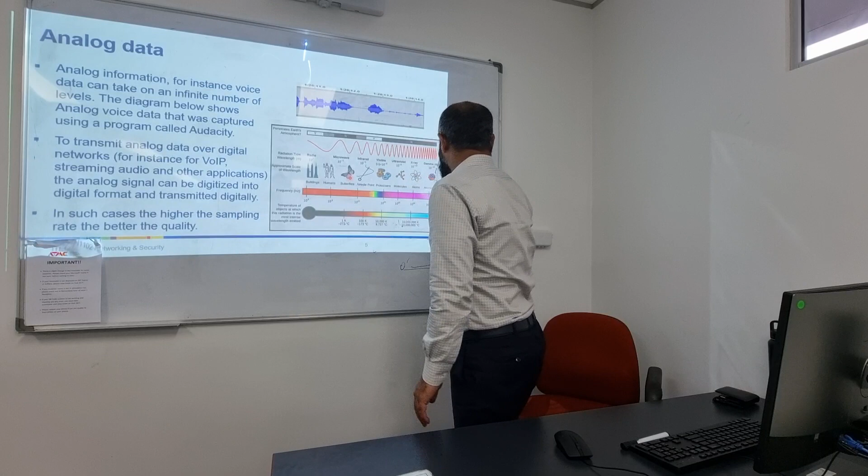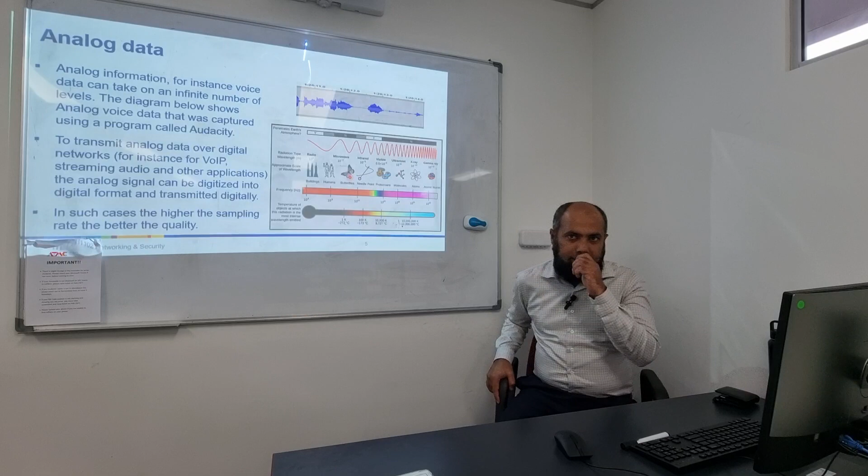So before that, first of all, look into this image. What is this image telling us? Why are they putting images there of a building, human, butterfly, needle? What do you think? Why? Does it make sense? Any idea how to read this image?

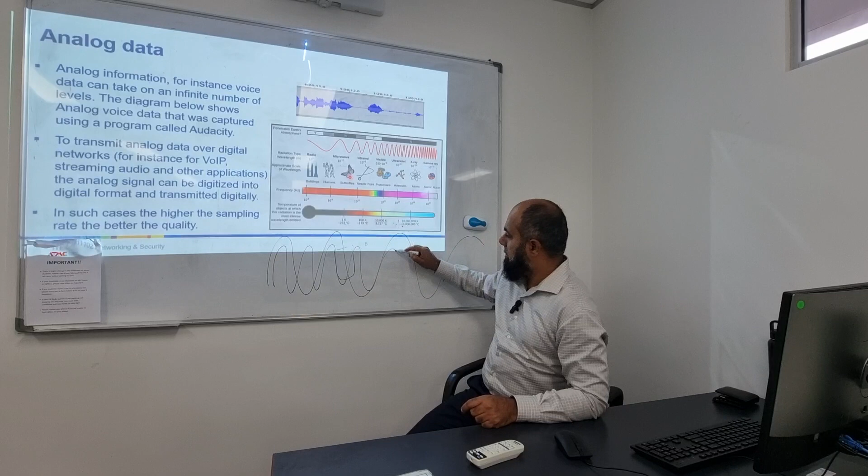Okay, I'll just give you an example. Let's say you have this remote, this length. There are waves coming like that, and then there is another type of wave which fluctuates more, more number of times, and then there is another one. I just made three. So which one has more possibility to hit that target? The first one, second one, or third one? The target is that remote which is there.

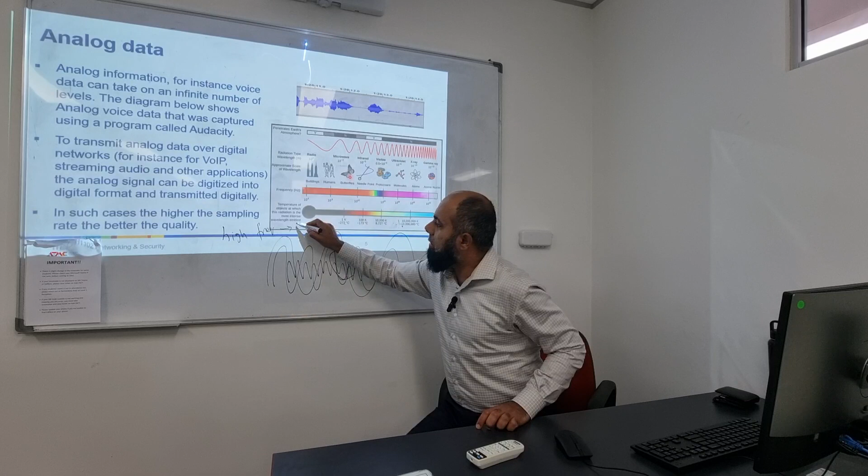Everyone will hit the target because... No, no, but which one has more intensity, probability, more chances? That is the third one. Third one. Why? So it's making so many waves, with a smaller value. It means that if the wavelength is smaller and smaller, it has more penetration power. So in our X-rays and radiation, they are very high frequency. Remember that when it is high frequency, then at the same time our wavelength is low.

Okay, high frequency wavelength is smaller and smaller. That's why X-rays can penetrate to our tissue levels to see whether there is any fracture or not. So what they do is they send the radiation, and it goes back to the system. If it goes back according to their study, that's okay. If there is some fracture, at that fracture point it will not be sent back. It means there is a gap. They pass it. So that's how they know that this person has a fracture problem.

Similarly, you go to the airports when you have any metal thing in your pocket. If they are using a low frequency metal detector, then the wavelength is so high that there is a chance that it passes here and there and that person skips with that metal device. Whereas if it's a very high frequency device, it's impossible that the metal will be undetectable, because the wavelength is so small.

Now coming to the point, it says that when your wavelength is 10 power 3, the frequency is only 10 kilohertz. Okay, at 10 kilohertz we have 10 power 3. So it means that at that stage the scale of a wavelength is a tall building, as high as 1 kilometer. So that can hit that target. So it means that for bigger objects we can use low frequency signals.

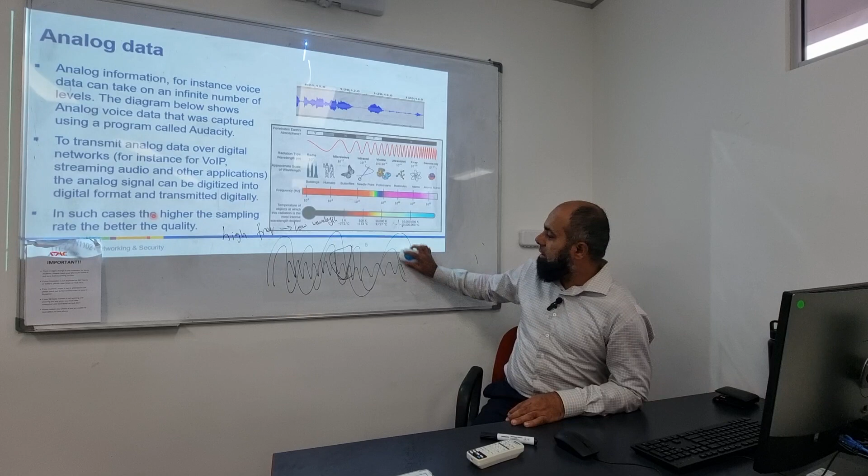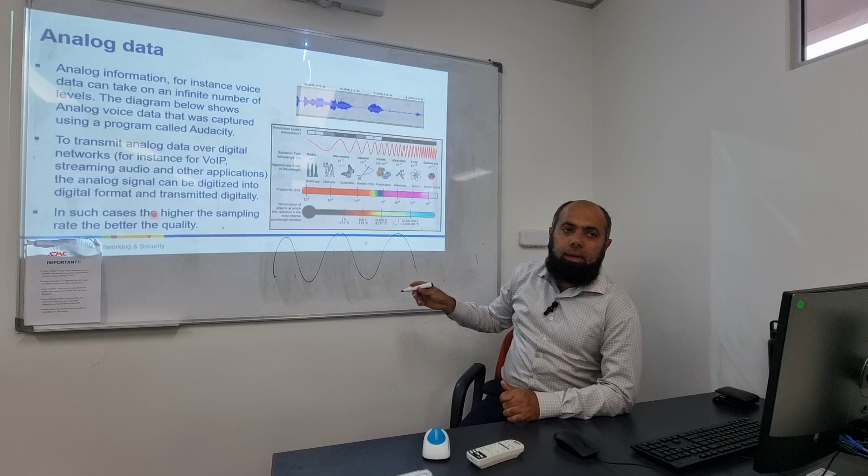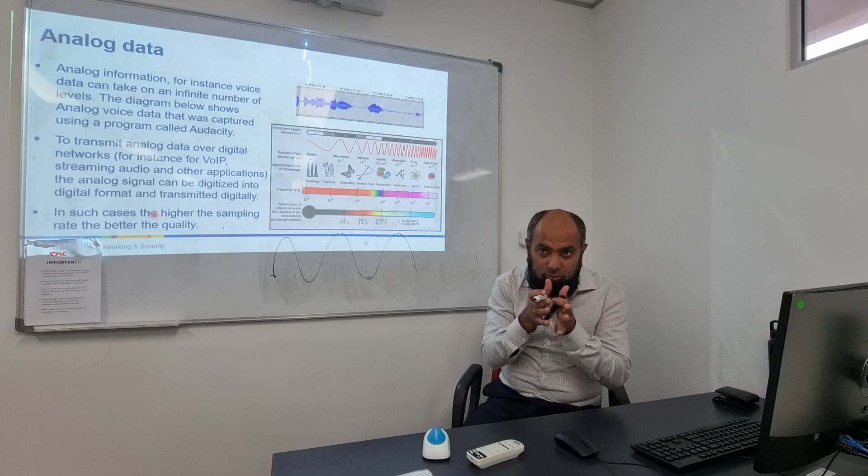Okay. The last thing is about the sampling rate. As I mentioned, for any analog signal, let's say this is an analog signal we have, and I want to reconstruct it because I want to make it digital. Because for every single point from here to here, there are an infinite number of values in between. If I zoom in on that, it's 0 to 1, like this.

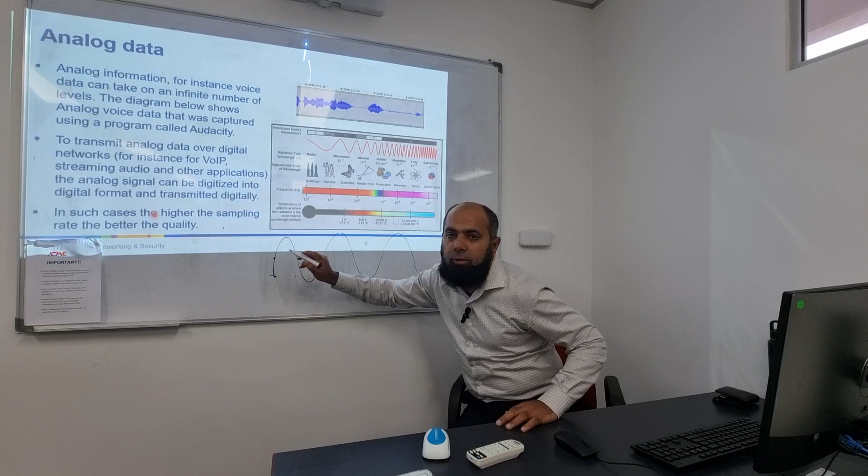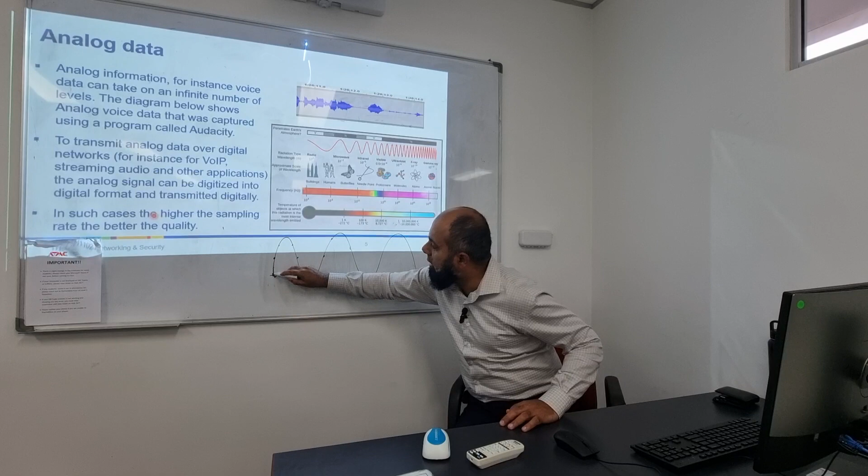So if I want to make a digital signal, I say, okay, I will take one sample here every 2 seconds, something like this. So when I reconstruct it, I have only those dots, so I can do it like this. But if I have fewer samples, one here, one here, one here, then maybe it goes like this.

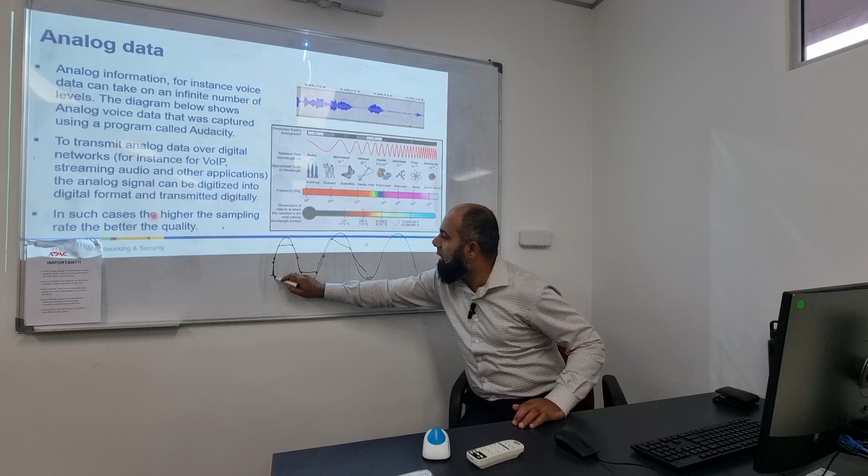So it means that the more sample values we take, the better we can reconstruct the original signal. But if our sampling rate is less than some particular amount, I'm not going into that detail, then we are not able to reconstruct our signal back. Got it?

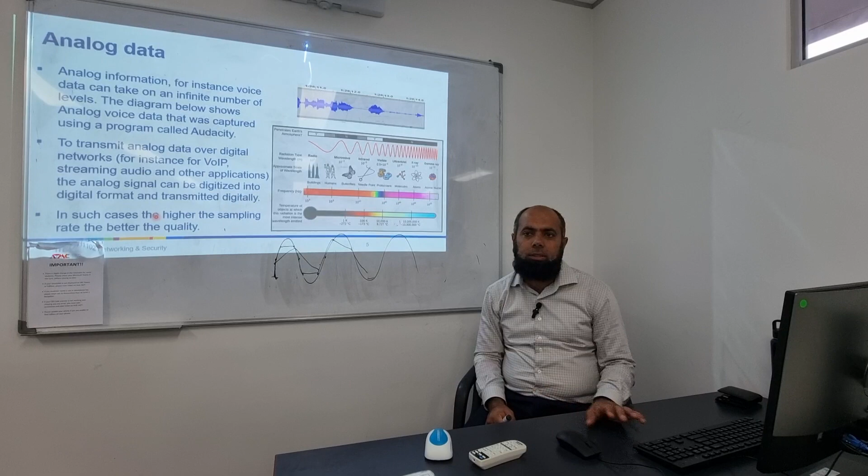So data transmission media is either digital or analog. The cable we use to connect computers was developed for the transmission of digital data. Devices like Wi-Fi access points, the telephone system, and microwave dishes are analog by nature, because when they are sending signals in the air, that's analog. In the air we don't have digital data. Once it strikes the antenna, it is converted, with some processing, into digital form.

So what we use is modulated analog transmission. Digital data can be sent over analog transmission media. The presence of an analog signal could signify a 1 bit, and if there is no signal, we say it's a 0 bit. So we are sending digital data over analog transmission lines in our systems. Now looking at point-to-point and multipoint circuits, okay, can you read that slide? Read it.

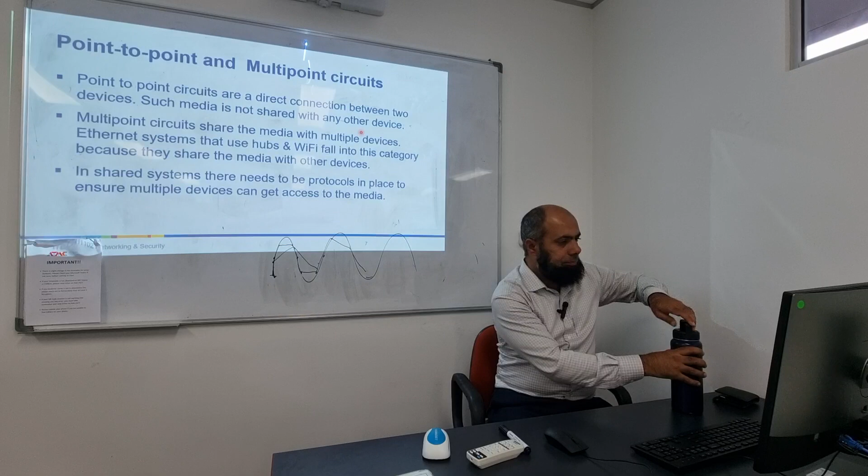Point-to-point circuits are a direct connection between two devices. Such media is not shared with any other device. Multi-point circuits share the media with multiple devices. Ethernet systems that use hubs and Wi-Fi fall into this category because they share the media with other devices. In shared systems, there need to be protocols in place to ensure multiple devices can get access to the media.

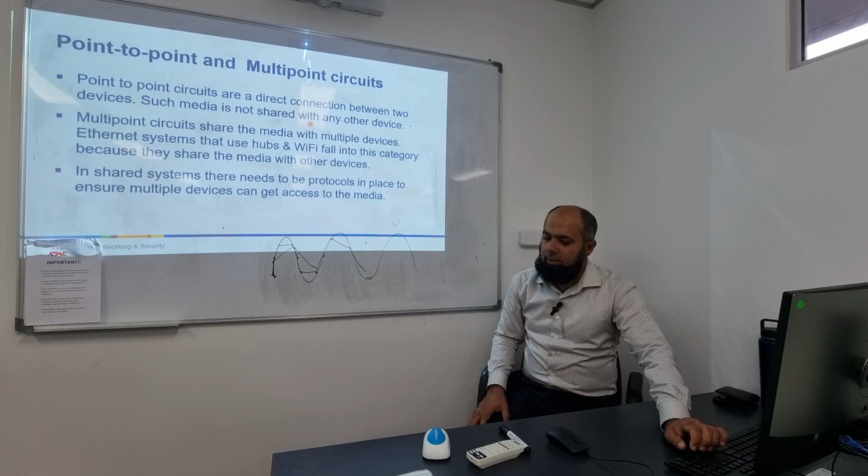Yeah. So what we are saying here is, point-to-point is one where two devices are directly connected to each other. Multi-point is the one which is connecting with multiple devices. So our Ethernet systems, for example our hubs, Wi-Fi, fall into that category where they are actually multiple points connecting, and they share the media with other devices.

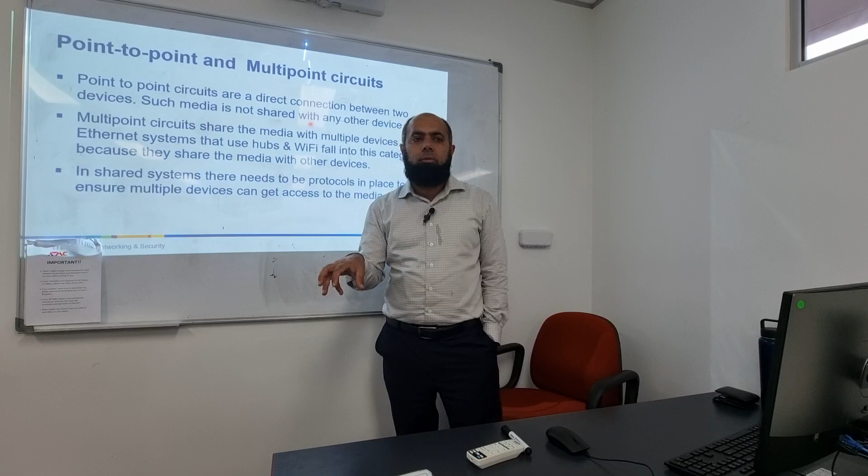And in shared systems, there need to be protocols in place to ensure multiple devices can get access to the media. So in a shared system we have switches, we have routers connected to the systems, depending on what information we need, but this is how they are connected with the media.

Coming to data flow, there are simplex, half duplex, and full duplex systems. Systems can be categorized according to the way data flows between devices. So simplex can only send in one direction. For example, a radio station sending the data, we are only going to listen to it. That's only in one direction. That's a simplex form of sending data.

Second is the half duplex system, which allows data in both directions, but at a time only one can send information. For example, a walkie-talkie. On a walkie-talkie, one person will finish his talk and stop, and then the other person will speak, and that's how they communicate over half duplex.

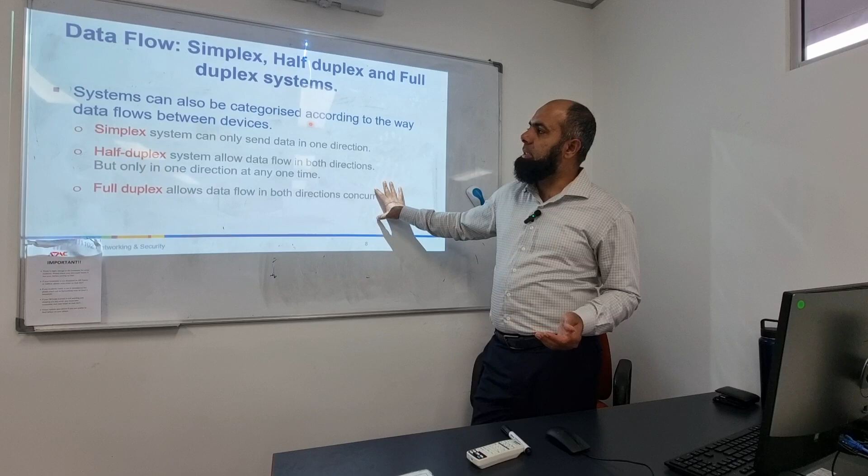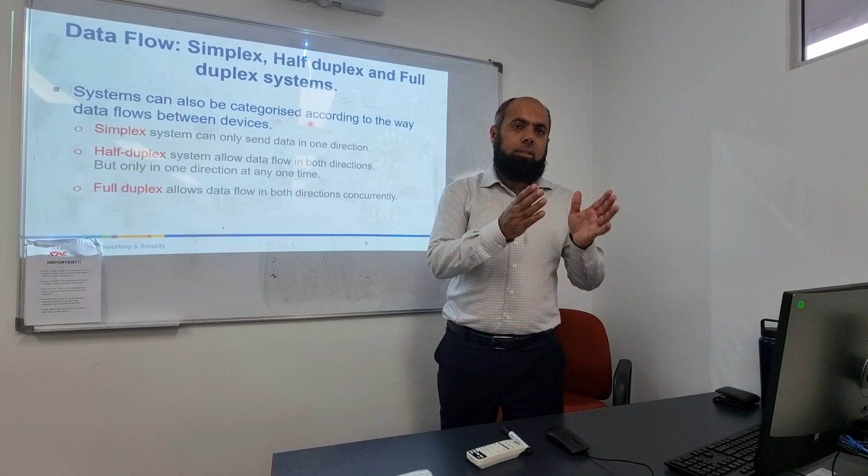Whereas full duplex is like our mobile phones, and they can transmit in both directions. Why is it possible? Because whenever we say that, it means we are making a channel, we are making a path. So the sending path to the other person is different, the receiving path is different. That's why we both are able to speak at the same time and listen and actually fight with each other.

Whereas in half duplex, it's hard to fight with each other because when one is speaking, the other has to stop. In full duplex, both can speak and maybe cut the other person off as well. But in half duplex, when one is talking, unless he says stop or something, no one can hear each other if they don't make a rule.

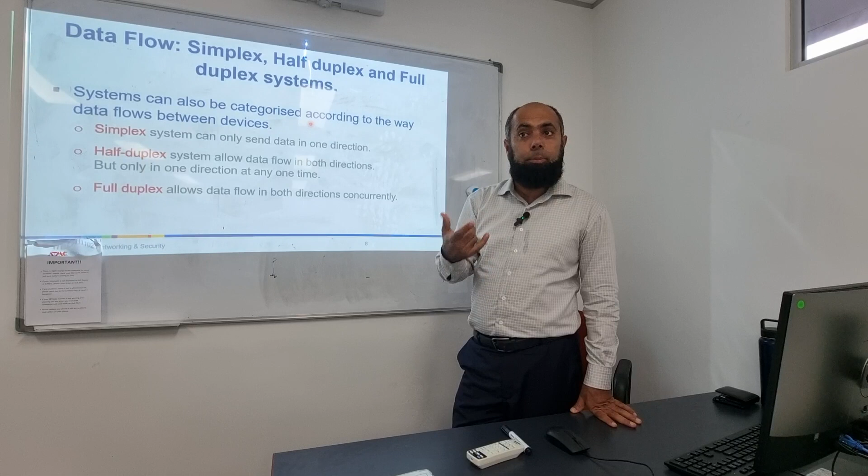So in full duplex, there are two channels. One is uplink, another is downlink, incoming and outgoing. So on our phone, when we make a call, our downlink channel is different and the uplink channel is different. Then we have the concept of multiplexing. Okay, can you read this slide?

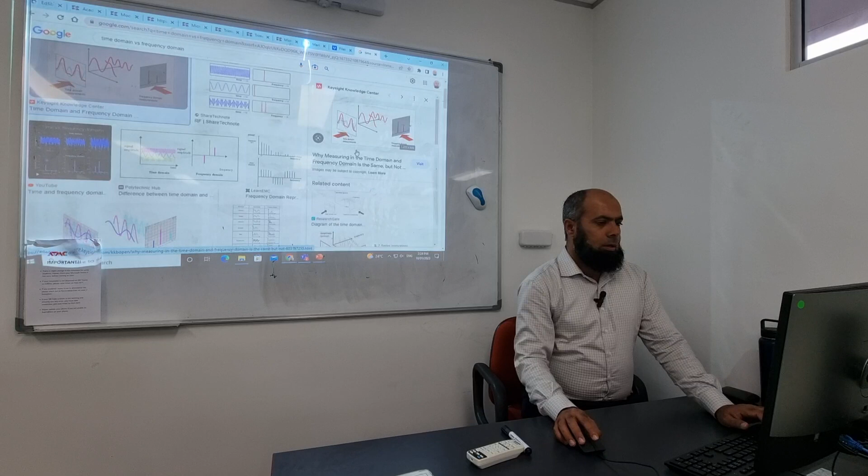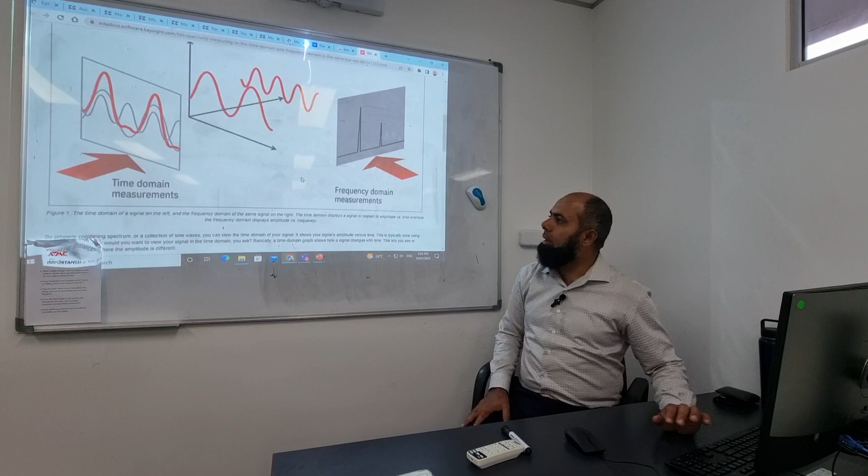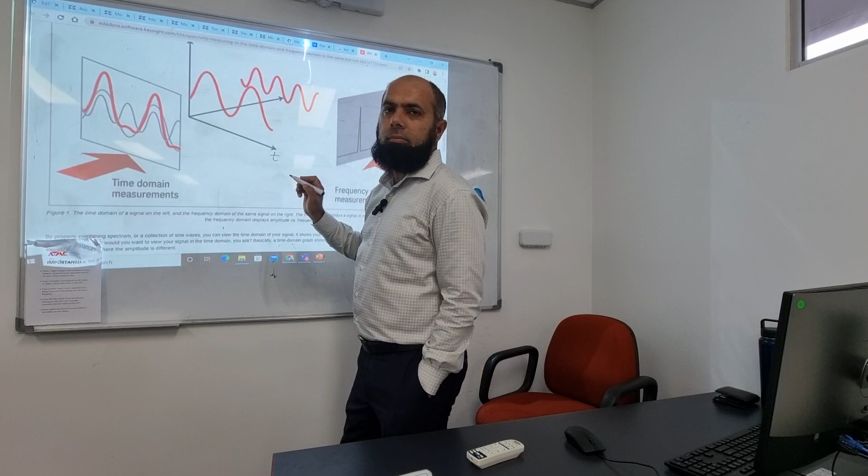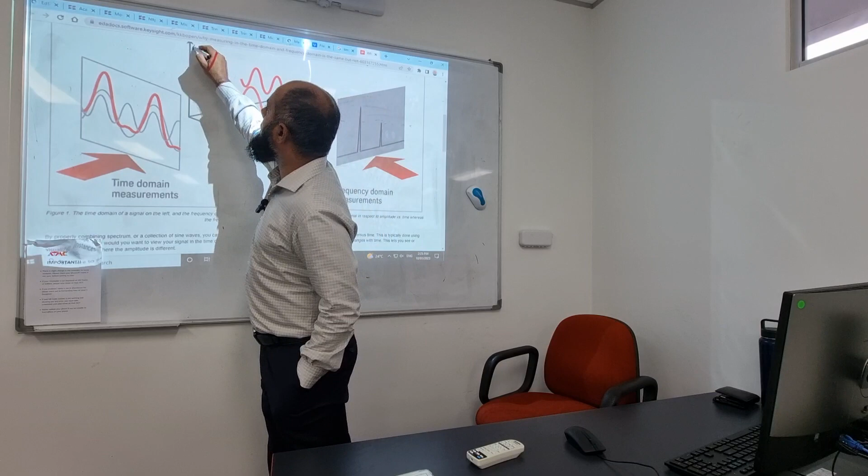There are multiple ways we can explain that. Before going into detail, I want to explain the difference between time domain and frequency domain. If you get that idea, it's very easy to understand. Okay, look at this example. Remember that this is your time wave going on. The first line is there, the second line is there, this is a frequency. This is the amplitude of the wave. How much is the amplitude?

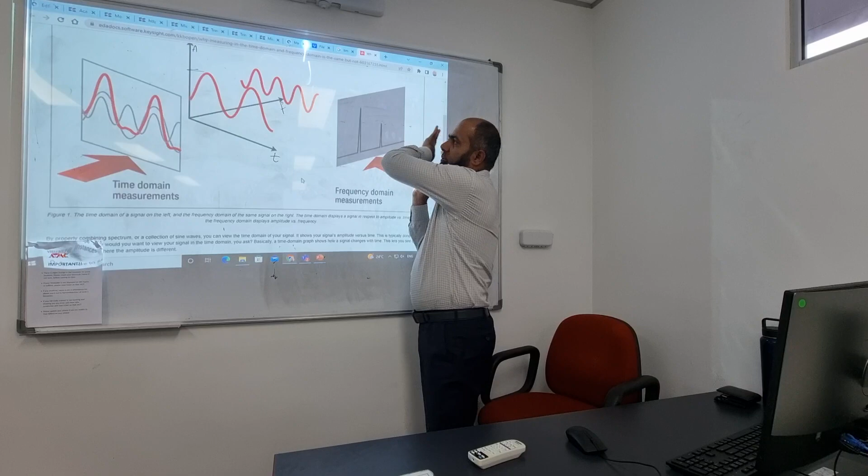Now, before that, let's say I show you this pen. What if you don't know this is a pen, or a board marker? How does it look from here? What can you see? Just a line, from your dimension. But the person standing there can only see a circle. So this is something like that. One view is from this way, and another view is from this way.

So let's first take the time domain. I'm looking from here. This is a wave I have made. Let's say this wave starts here at 0 and finishes here. So this is a frequency of 1 and amplitude, let's say 2.

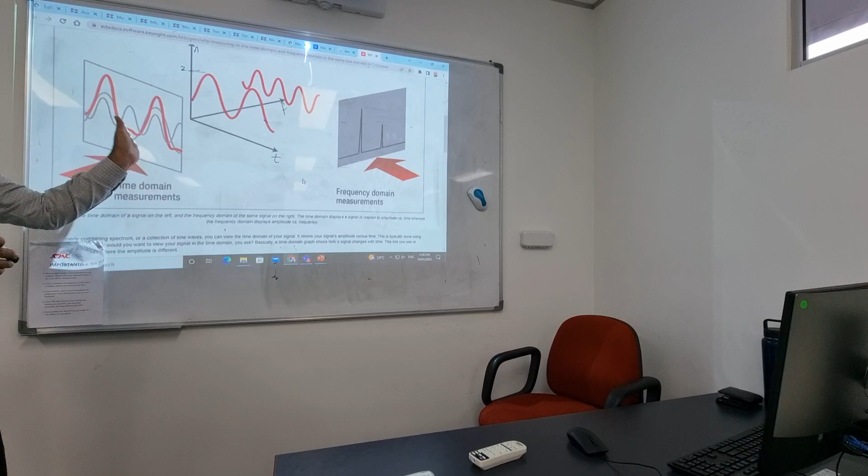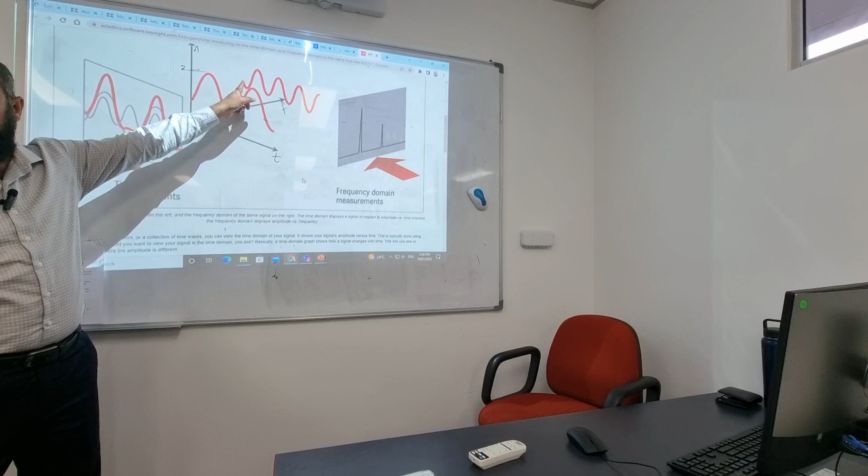Okay, this is the first one, and the second one I made because remember that this is a time signal, so I am actually making multiple waves at the same time. So another wave, if I want to make it, should be started at the same time at 0, but I make it a little bit at a different value.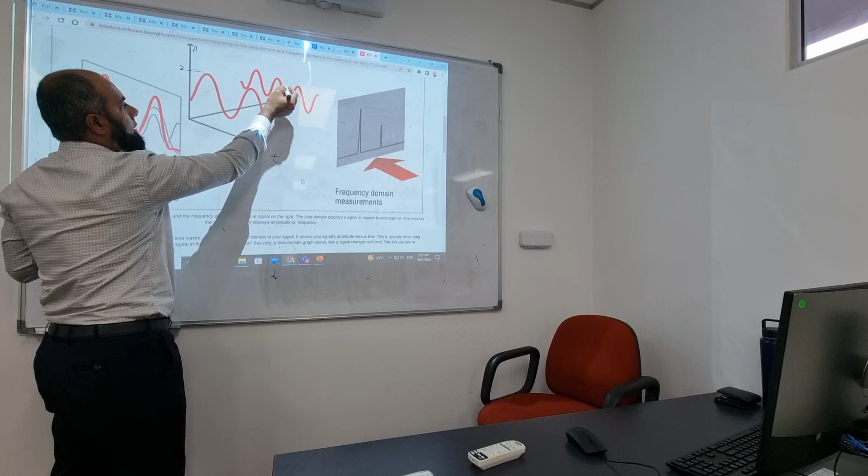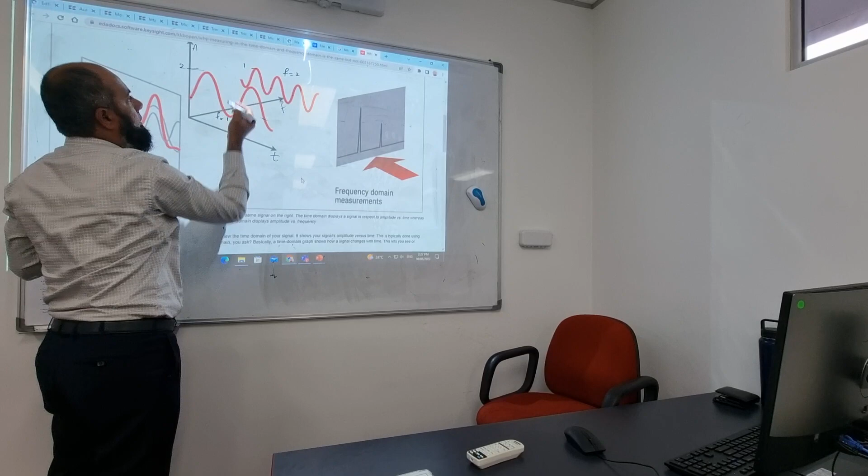What could that value be? For example, now start from here: 1, 2. Let's say the frequency of this one is 2. The frequency of this one is 1, and the amplitude of this one is, let's say, 1. Okay, so it means that this is at a position of 2. Amplitude is 2. Yes, frequency is 1 here. Here frequency is 2.

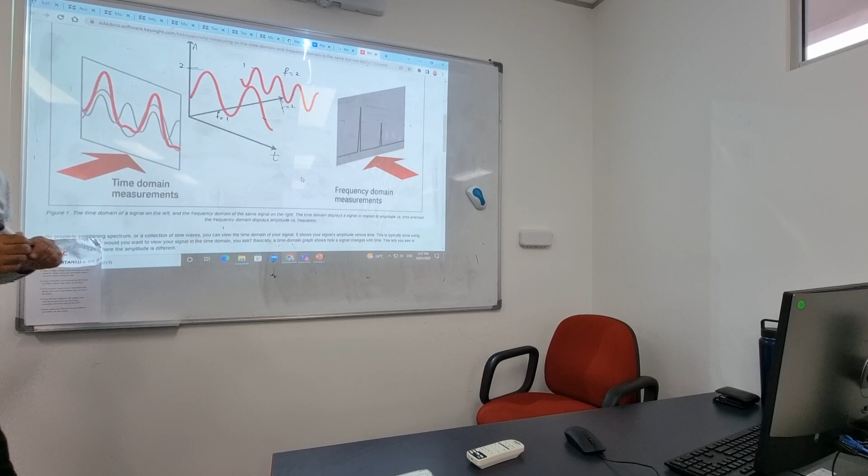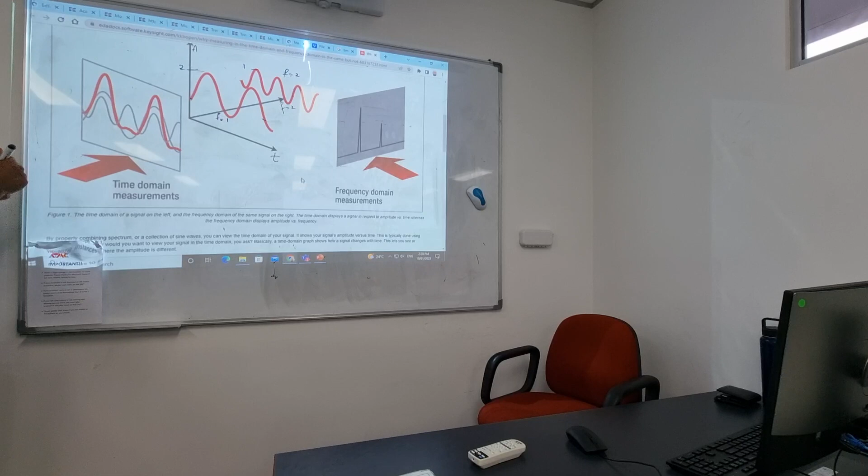So as you move forward in the frequency domain, because your frequency is going higher and higher, you're going far away from there. But it always starts from where? 0. Because all signals are starting at the same point. Now, when you see those signals here, this bigger one is the one with amplitude 2, and the smaller one is amplitude 1. Whereas this red one has frequency 1 and this is frequency 2.

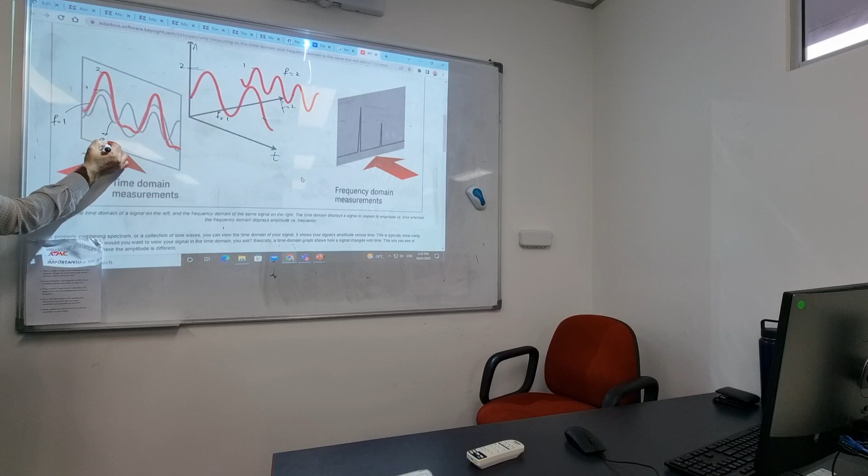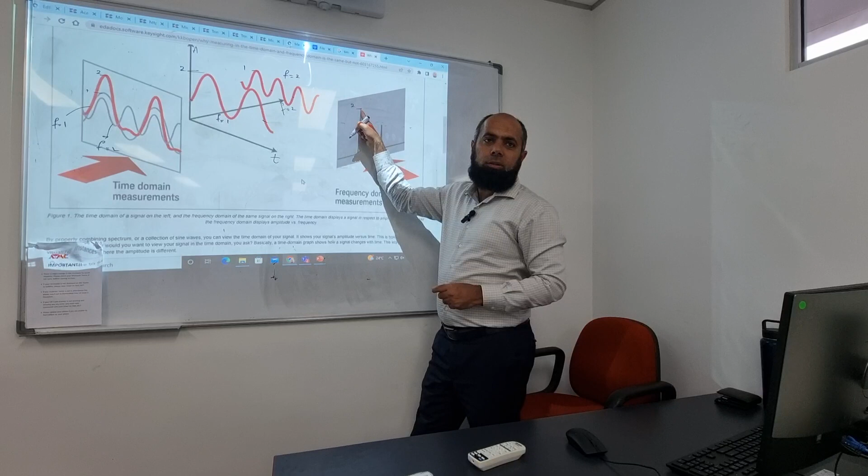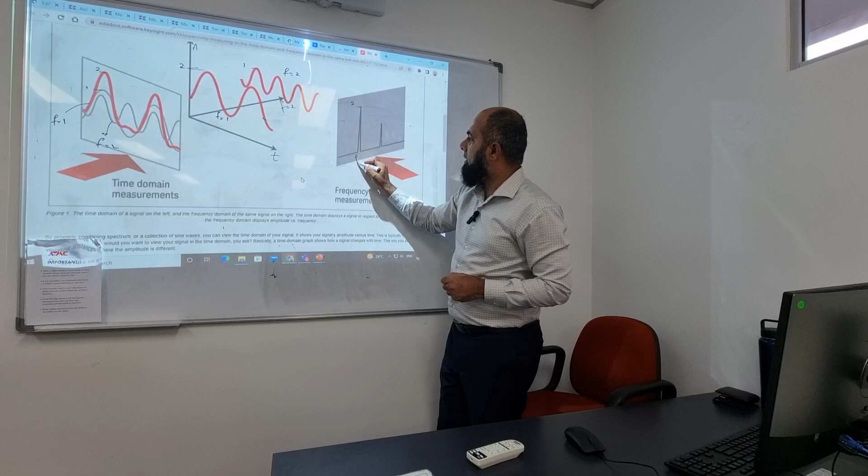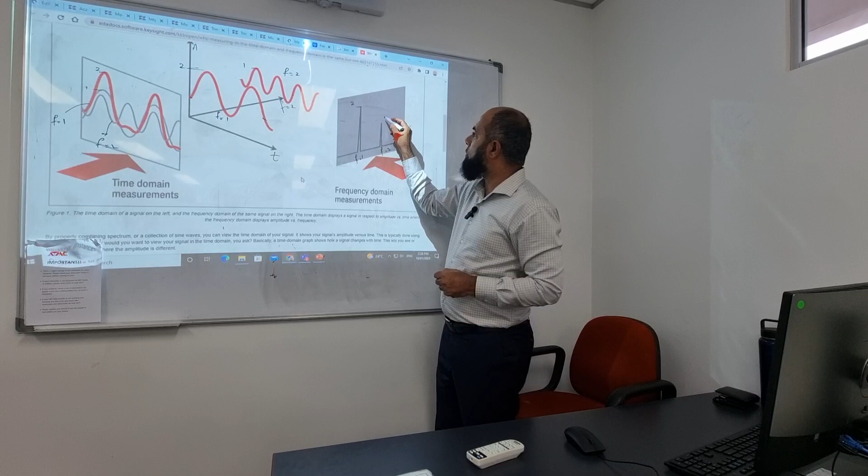Okay? Now come to this point. See from here, the frequency domain. You can see only the pulses. This pulse is what value? 2. This is amplitude. Why is it a pulse? Because this whole information from here is only a line, because we can see a line only. And therefore, we can say this is at f equal to 1. At f equal to 1 it is 2. At f equal to 2 it is 1. We can see that this one is this one.

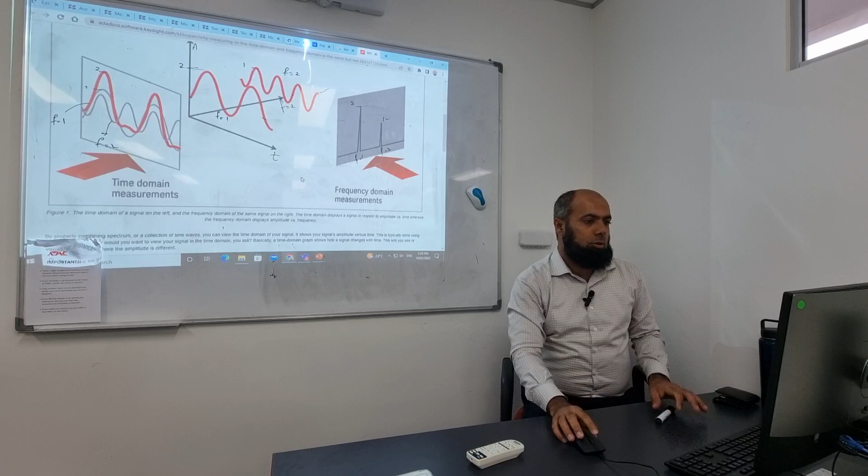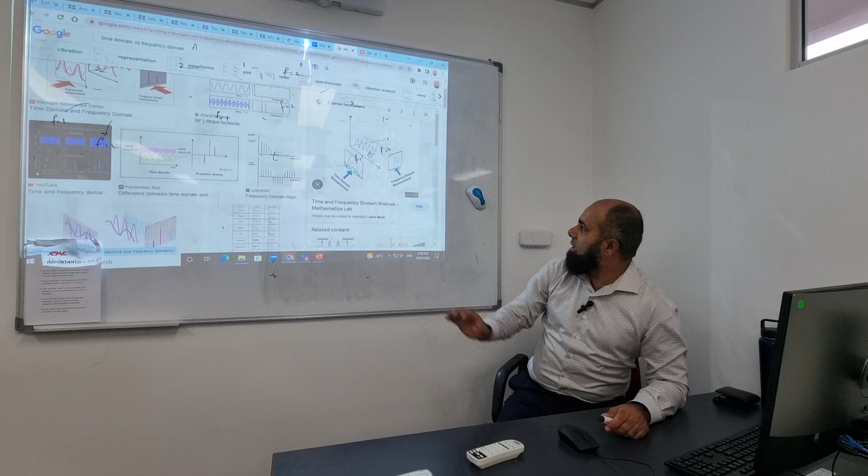Make sense? Yeah. So now if you understand that, because this is how the two-dimensional things work, we can quickly look at some examples. This is a similar thing, but you can see how it looks in different domains. So it is easy now to understand. This is a time domain signal, and if I want to see its frequency, I can see from the values this should be a higher frequency than this one. That's why it is further away from the 0 value. This is nearer to 0.

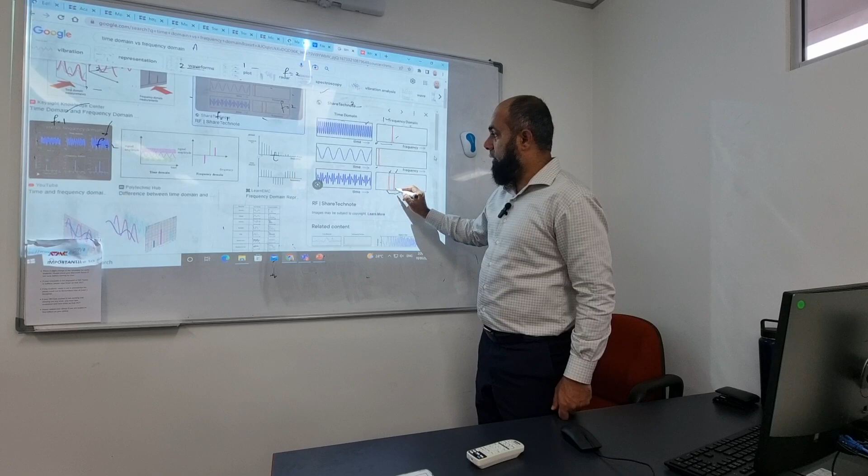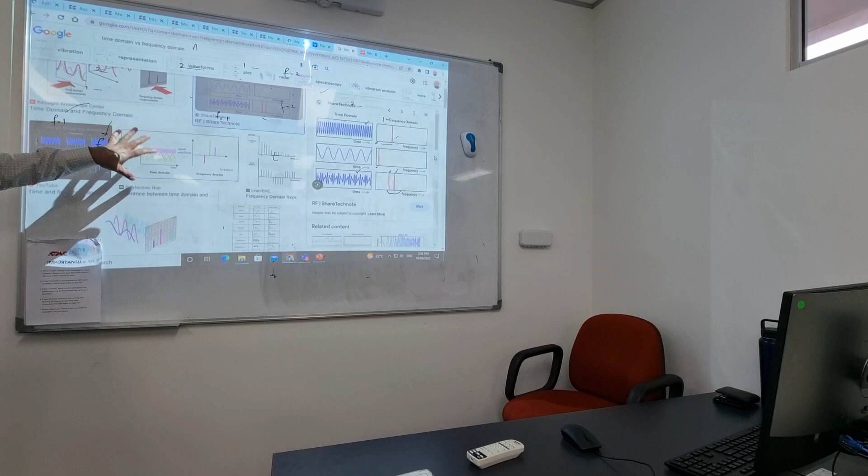And here, these two values mean that there are two frequency components in this time domain signal. This itself is a complete study, how to process frequency domain signals and time domain signals, and it's a very interesting thing. And similarly you can see anywhere. So the frequency domain and time domain are totally opposite to each other.

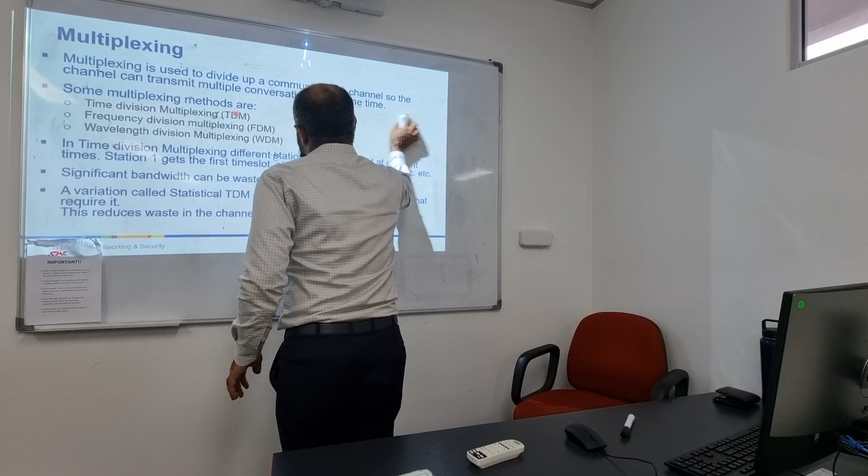Okay, now coming back to multiplexing. So here, with time division multiple access, let's say there are 8 students in the class and every student wants to talk with me, and I said okay, one student can talk 5 minutes. Then the 8th student has to wait for 35 minutes, because 7 times 5 is 35. So 35 minutes of talking, and that student has to wait that much time.

Rather, we should make it 1 minute each, then the next person waits in a queue, comes back again, and in that way every student gets time very quickly rather than waiting 35 minutes initially. The same thing happens when we make phone calls. Our calls also use time division multiple access, where our time in microseconds is shared between the users, and it keeps switching, so everyone can get access.

Otherwise, if the whole channel, the whole road, is given to one person, user 1 first for 5 minutes, user 2 for 5 minutes, then the person at the 8th position has to wait a longer time. Whereas if we make it 1 minute, just as an example, but in telecommunication it's less than a microsecond, we are switching between the users. So when it switches between users in microseconds, our ear can't tell that the call is switched in turns.

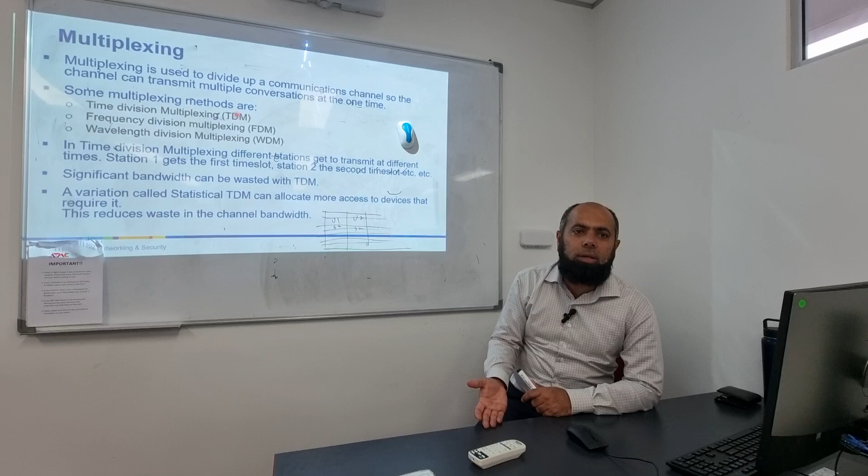So another way to see that thing is, I can make multiple lines here, 8 lines, 8 rows, let's say, and with that bandwidth, with that road divided into 8 parts, 8 people can actually go at the same time. That is known as FDM, frequency division multiple access. So what we are doing here is dividing the whole thing into smaller parts in the frequency domain, so that bandwidth is not wasted. Okay, make sense? But on the other hand, with time division multiple access,

Can you close the door?

So on the other hand, with time division multiple access, that method is also used at some times. For example, we know that there is traffic from 8 to 9 in the morning and then 3 to 4 p.m. So maybe at that time, by having statistical data, we can use TDM, because we know that one person is using too much time, or the number of people, so we can allocate more people in TDM. But every different multiplexing technique has different benefits. So in that way, we can reduce the channel bandwidth.

Remember that your bandwidth is something like, for example, Telstra, Vodafone, Optus, other companies, they actually apply to the government to access a particular bandwidth. So, for example, Vodafone has their allocation of bandwidth, let's say 890 megahertz to 895. Maybe they were allocated a 5 megahertz band only. So they can only transmit and use that band to give to their customers. For that, they charge.

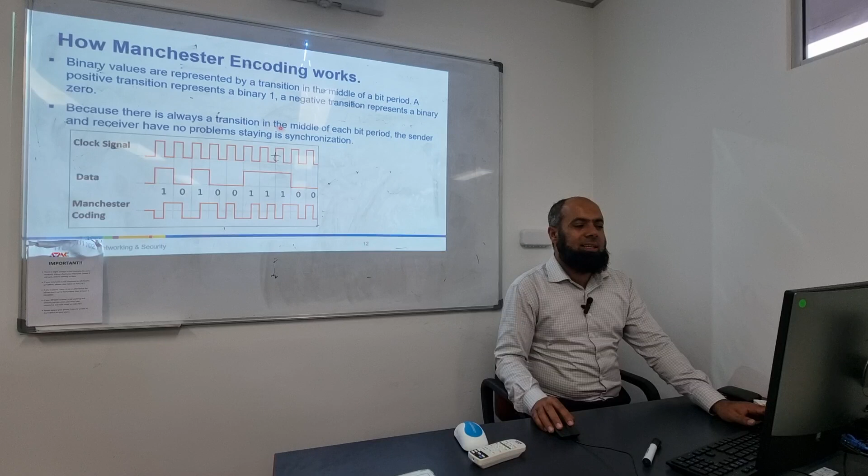A positive transition means a binary 1. If a negative transition is happening, it means it's a binary 0. Because there is always a transition in the middle of each bit, the sender and receiver have no problem staying in synchronization. So they can synchronize with each other because they are changing it in the middle of the bit. So you can see that, for example, this is your clock signal, because a clock signal always says 10 10 10 10 like that. But this is your data, 1010011100. So we're looking at these two things now.

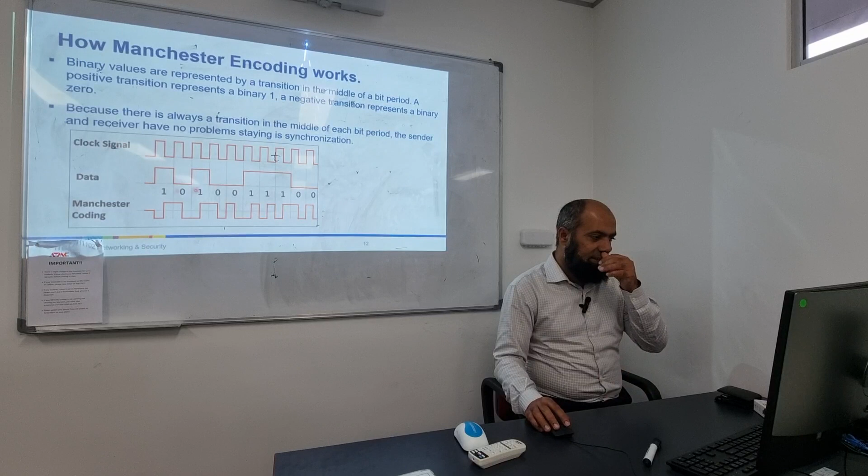Okay, here I will show you a small video because it's easy to see when we make the circles and graphs. See this one. This is your data, 01001100011. It makes more sense for you to get understanding. So see, for a 0, we know that the transition is negative and halfway. Then for the 1 we will make it like that.

Just remember that for 0 always start with high to low, and for 1, remember that we can see it is starting from the middle point, it is going up. That's very important to understand. From the middle point it is going up, whereas for this one at the middle point, we are at the low point. And of course, when we are starting from the starting point, it's a bit tricky, because wherever we have to start, from that point we take it as a 0. Let's see another one, at the end you will understand.

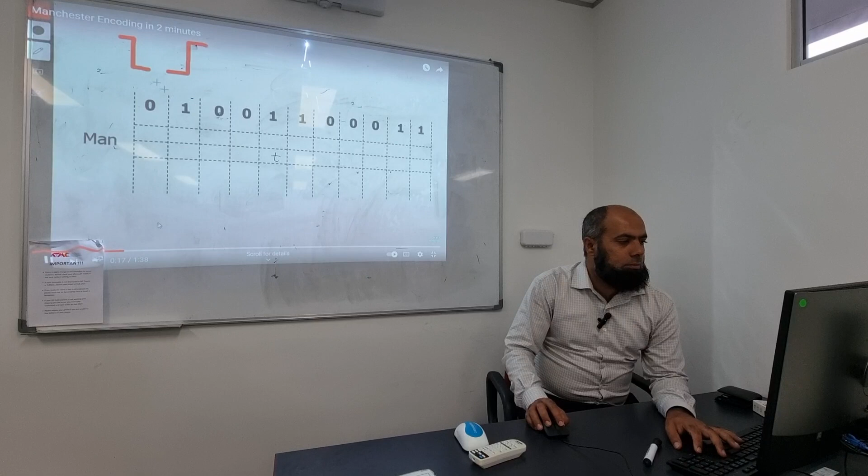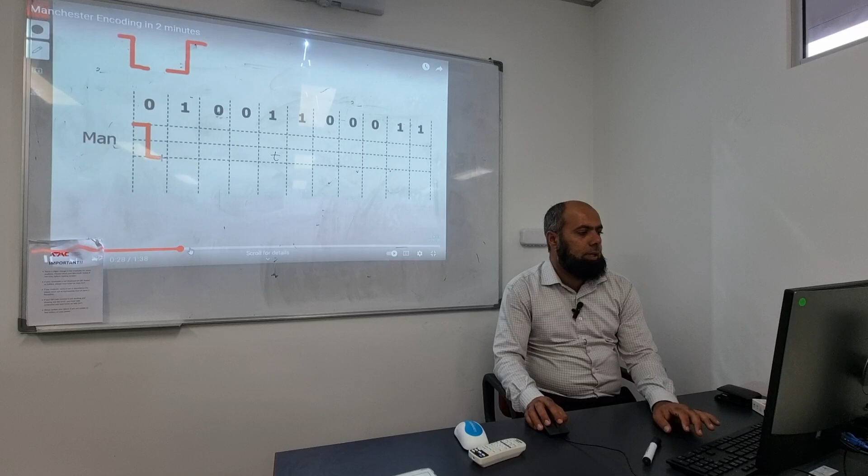So once we move forward and we know that it's 0 again, 0 again means that in the middle of the bit we will change to the next signal. So this is how it looks. So this is how we make it. This is 0. Make sense? Yeah. Then this is 1.

Is it clear? If you have a pencil, try to do it, because it looks very easy here, but if I say to draw it by yourself, you will not do it. You can't do it until you have practiced 2 to 3 times.

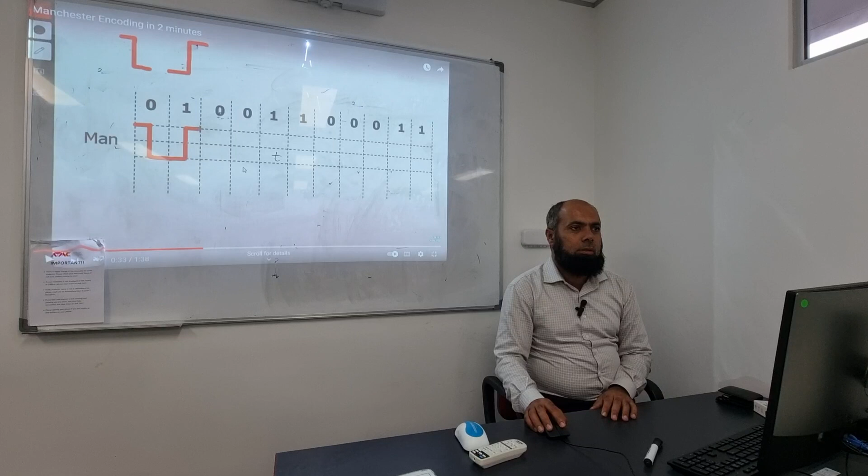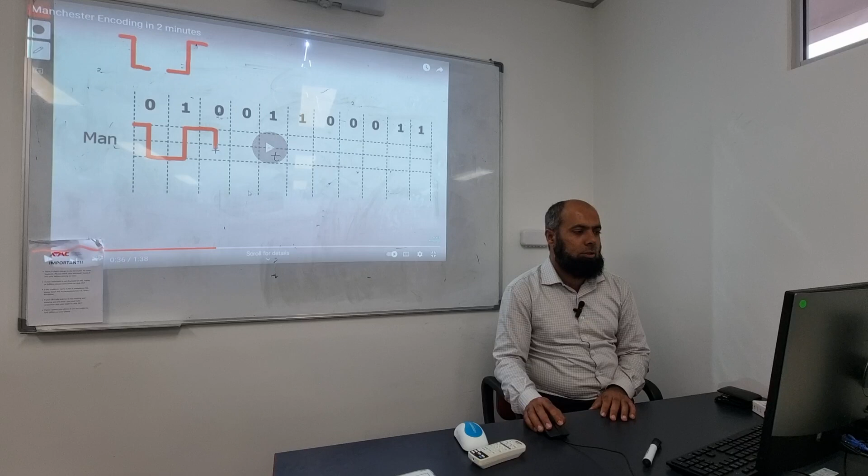Okay, so next, again 0. So see, with the 0 it is going halfway up, then 0. Okay, let me know what we should do here now. It's 0. Hmm? No, we start from 1. See, remember, that's an important point.

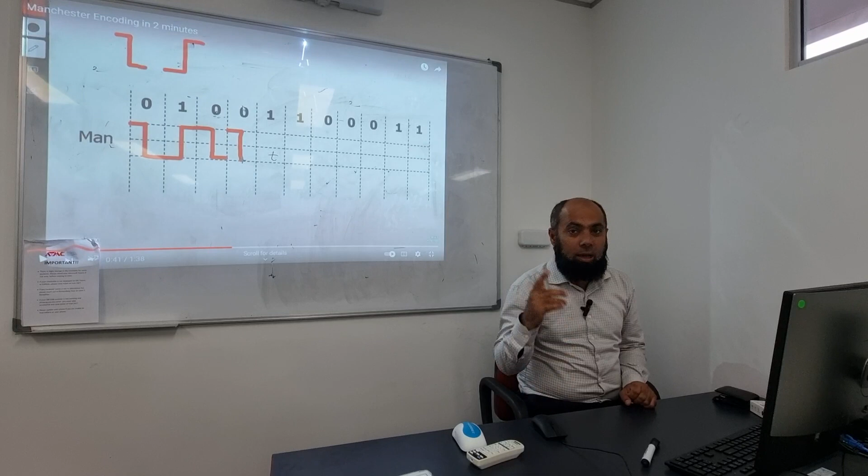When 2 zeros come, because there is no transition happening, it will start again. So that's how we know that the clock is synchronized by the sender and receiver. Make sense? Because this is a tricky point here. Maybe you have a question in your midterm test as well. That's why it's important for you to understand.

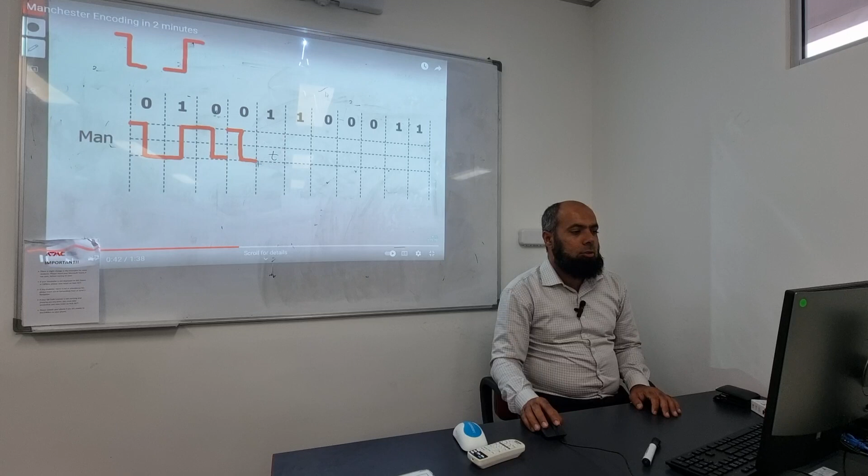So now we can see, we make it like that. It's 0. So remember that whenever 2 of the same bits come, then you need to redraw by yourself. You don't need to rely on the past values. Like when 2 zeros come, we just stop it there and then make it 0 again. Yes. So you can see that now 1 comes, positive transition, stop here. Then from the beginning, from the bottom, because 1 is always a positive transition.

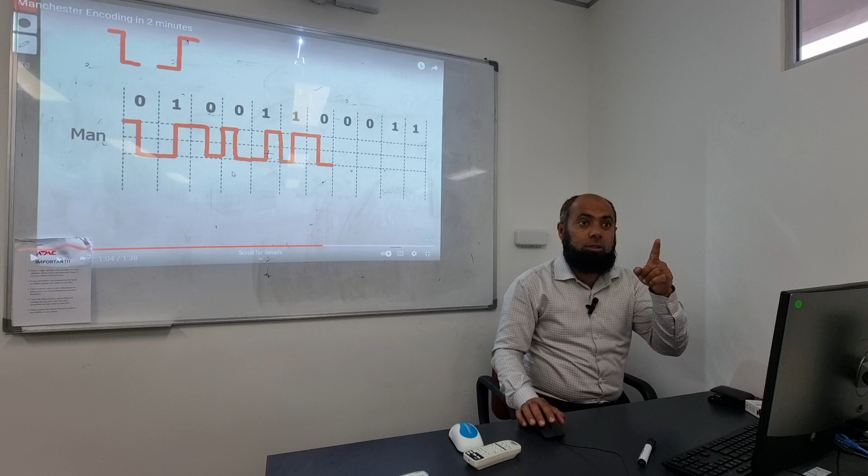Then 0, stop, and at the end you can draw, make them touch each other. That's not a problem. Because if you do it while doing it, you will be confused. These lines you can make later on when you finish it, because otherwise if you do it at that time, you will be mixed up.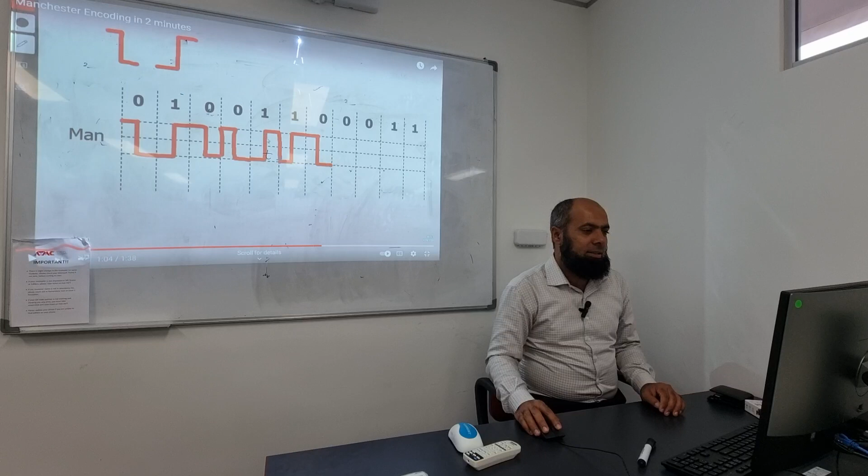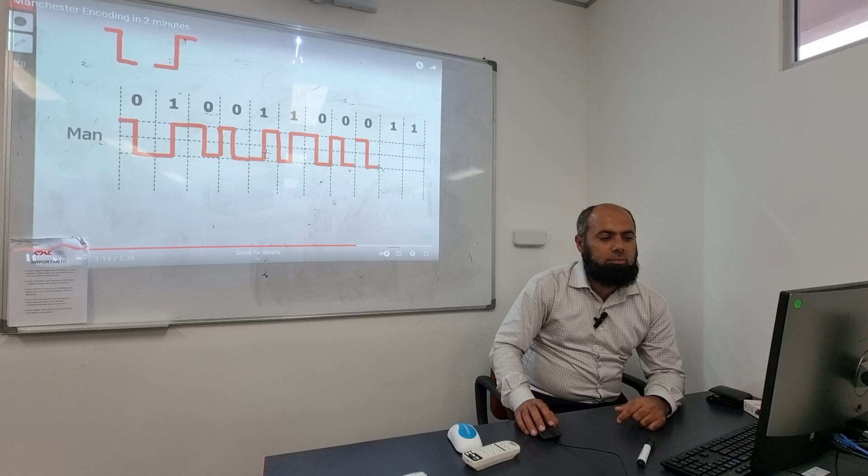Now 0, again it starts from top to bottom, because 0 is top to bottom, and then you can draw it. Then top to bottom, and from now 1 comes from the bottom to up, and then again bottom to up. So this is how the Manchester coding looks. Make sense? Yeah.

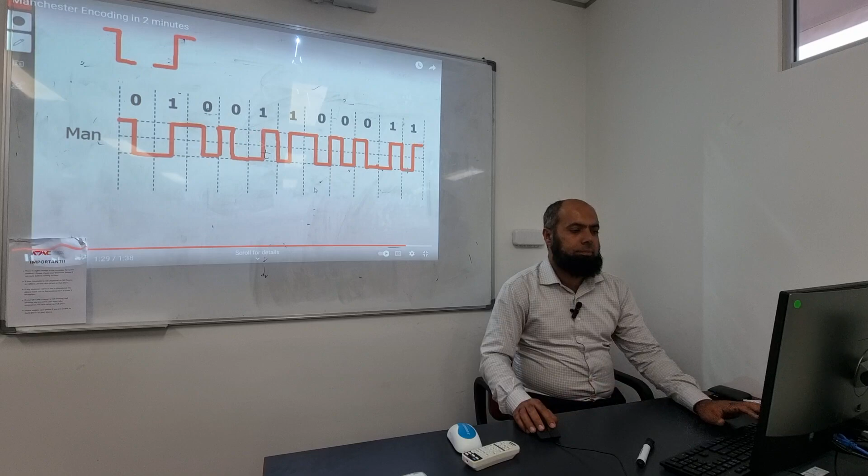Now you can see in your one, don't worry about this clock signal, see only these two. So 1 going up, going 0, going up, down. So here again, start from 0.

Because yesterday in class when I was explaining to the students, I didn't have that video which I showed you. So they were really struggling to get the answer. So I thought I need to change my method for your class. So now you understand from that video why it's like that.

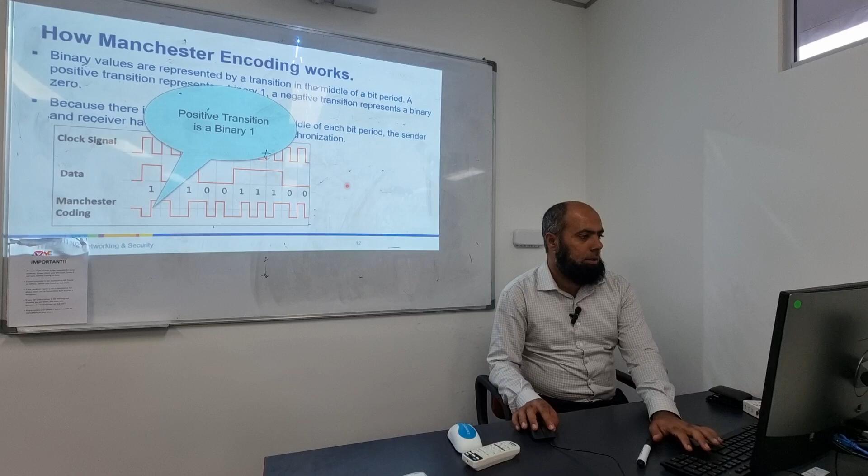So then again from 0 to 1, going up, and then from here to here again 0 to 1, 0 to 1, and then you can do that. Clear? Yeah. Okay. So a positive transition is a binary 1, and a negative transition is a binary 0. The signal is positive half the time and negative the other half. So no net DC component.

DC component means no value on the 0 value, on the original value. See, if we start from here, there is nothing in between, no value on that, due to that half-time variation in positive and negative.

Now coming to transmission media. There are many types of transmission media used in network and communication systems, starting from unshielded twisted pair, coaxial cable, optical fiber, terrestrial microwave, satellite microwave and infrared. These are 7 to 8 different ways we use in our telecommunication network to send data.

It depends. Data is sent between one person and another person, between one person and the shared network, one person to different devices, or between countries, between cities, between different networks. Some data is a small amount, some data a huge chunk of data, based on that. So if we start from twisted pair, okay, can you read that?

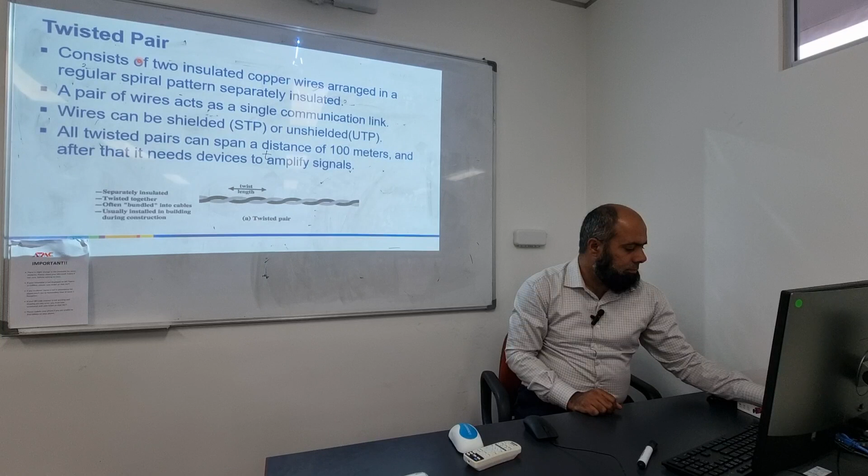Twisted pair? Yeah. Consists of two insulated copper wires arranged in a regular spiral pattern, separately insulated. A pair of wires acts as a single communication link. Wires can be shielded STP or unshielded UTP. All twisted pair can span a distance of 100 meters, and after that it needs devices to amplify signals.

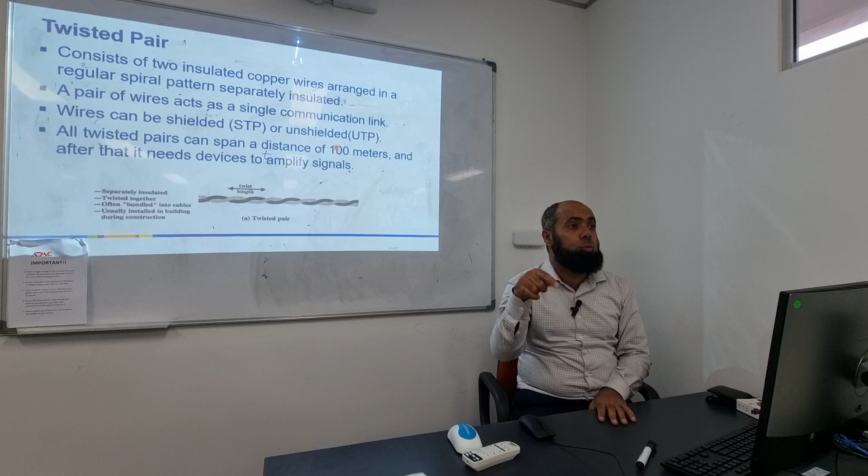Yeah, so there are two twisted wires. They are insulated from each other, and some are shielded, some are unshielded. Unshielded are UTP and shielded are STP. And usually the overall distance they cover is up to 100 meters. After that, you need to amplify or boost the signal if you want to send it further. So once we finish all the transmission media, you will know which type of transmission media to use for which purpose.

And if you remember the time of 7-8 years back, our YouTube videos, we can't run them on our mobile phones because there is no concept of HDMI. There is no concept of synchronization of videos, because the videos sometimes take maybe half an hour to stream. Then you are able to use it.

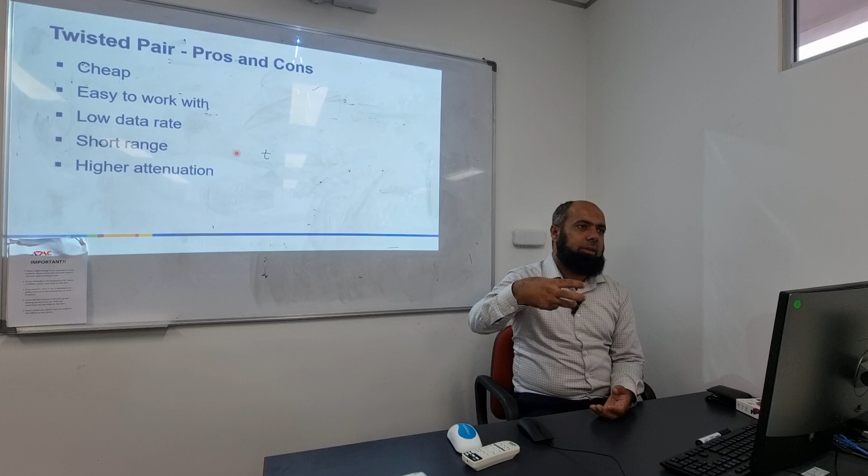So overall, if we see the twisted pair, they have a lot of different benefits and demerits, depending on their usage. They are not expensive, easy to work with, low data rate, short range, but higher attenuation. Attenuation is a function of distance. So when any data is traveling over a network, after a certain time, their amplitude becomes lower and lower, and they become weak. So that's known as attenuation.

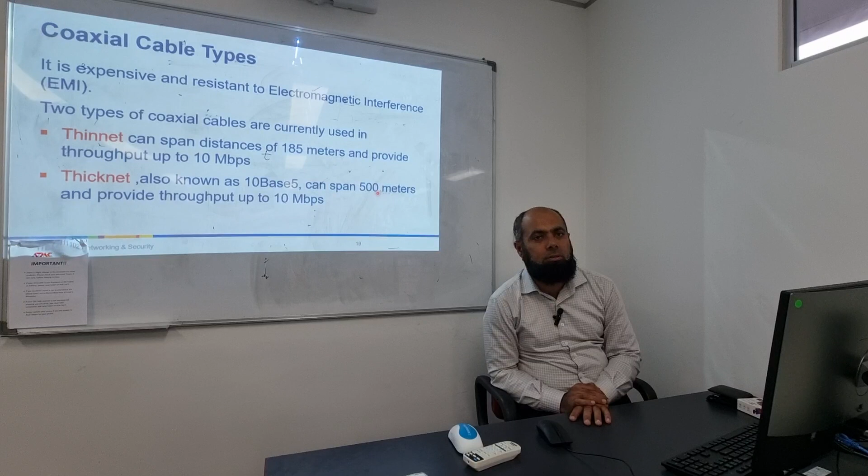So it is expensive and resistant to electromagnetic interferences. This type of coaxial cable is named in two different forms: thin net and thick net. Thin net has a distance of 185 meters and provides 10 megabits, whereas thick net can range up to 500 meters. So whenever you are using coaxial cable with different characteristics, they have their capacity to throw the data in the wires. After that, you need a repeater or a booster to re-energize the signal again.

So there are two common types of coaxial cable: baseband technology and broadband. In baseband, it is actually using the entire channel for its transmission. So only one signal can travel at a time in one direction, because you are using the whole frequency bandwidth. Whereas in broadband, you are dividing the whole bandwidth into smaller parts so that multiple types of data can be transmitted at the same time in both directions. So that's broadband technology. So that is the difference between these two.

So if we see the coaxial cable, what are their characteristics? They are much better than twisted pair, but performance is limited by attenuation and noise. Analog signals require amplifiers every few kilometers, or closer if carrying higher frequencies. Of course, when you're going on high frequencies in coaxial cable, there is more attenuation. For digital signals, a repeater every 1 kilometer, or closer for higher data rates.

So coaxial cables were common in early types of Ethernet systems like 10BASE2 and 10BASE5. We know that 10BASE2 thinnet is 185 meters, and thicknet is for 500 meters. So we used them for digital signals and analog signals. Now coming toward the optical fiber, which is another thing used for communication.

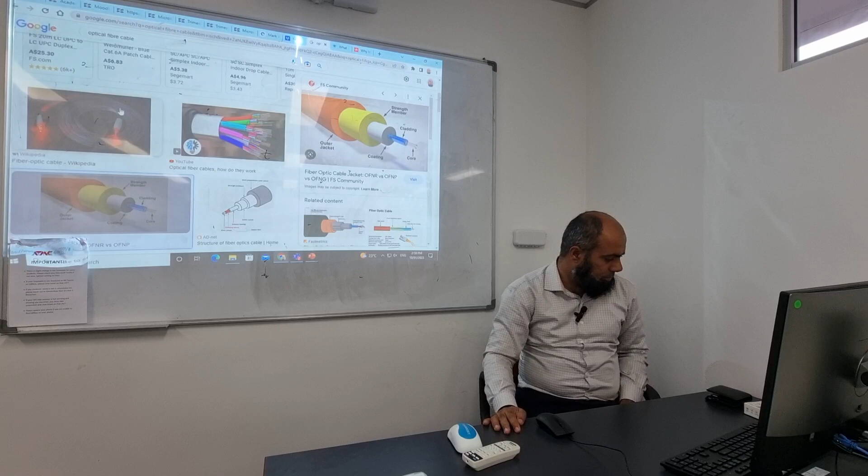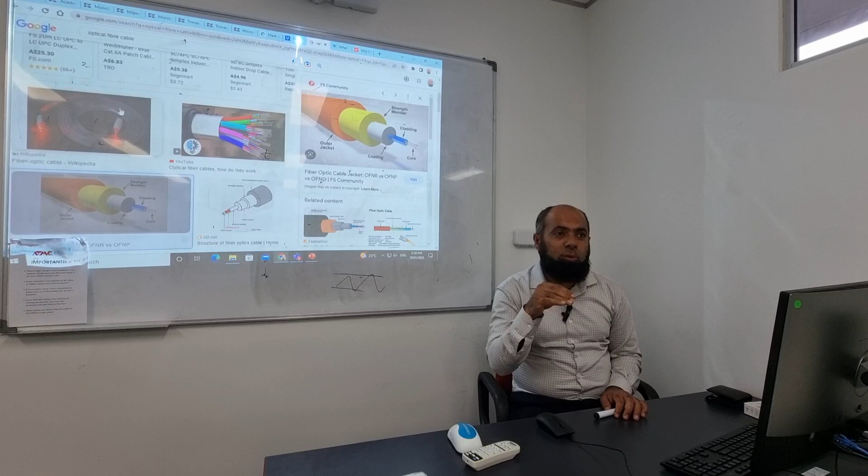You can see those lines, and if I make, where is the pen? Yeah. So this is a glass, so it travels very fast, like the speed of light, and we know that the rainbow has 7 colors. When colors are different, they have different wavelengths. So WDM, which we have seen, wavelength division multiplexing. With different wavelengths, we can send different data on it. So this is how this technology is used.

So here we can see core, cladding, and jacket, and you can see light at less than the critical angle is absorbed in the jacket, but if it's proper, then it keeps sending the data. So in optical fiber, we have single mode or multi mode. Single mode has a small glass core, can transfer data over a long distance, and is less susceptible to attenuation. It is quite immune to attenuation.

Multi-mode has a large glass core, can transfer more data but only up to a shorter distance. So whether we use single mode or multi mode depends upon the usage. But remember that the angle of reflection has to be more than the critical angle for it to work. So it has a much higher capacity than all other types of transmission media. It can send gigabits of data over tens of kilometers.

Lighter than UTP cable, a considerable advantage in laying, lower attenuation, very good electromagnetic isolation, and greater repeater spacing, like tens of kilometers at least before you need to repeat. That's why they are more used in back-end networking, LAN switches, long haul trunks. Long haul, or backhaul, means the networks connecting city to city,

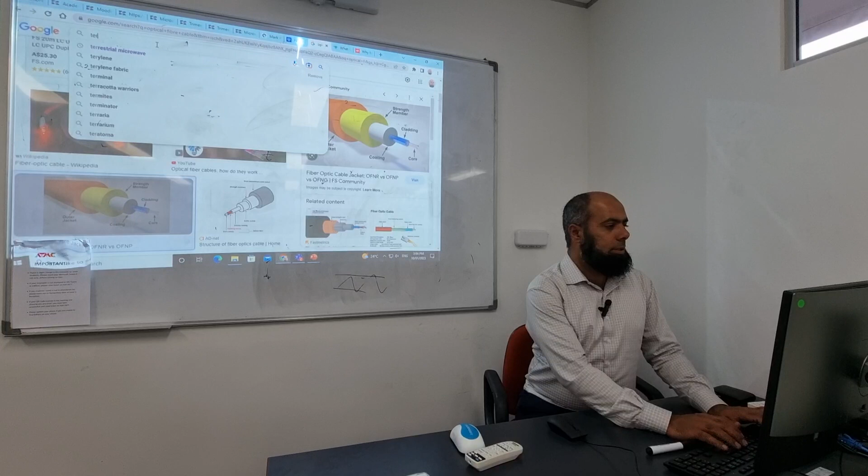Terrestrial microwave. Usually there are dishes like this, in a circular form. These dishes are all for microwave links. Those microwave links are always in line of sight to each other. They can see each other. If in a hilly area you put a tower with this at its height, you need to adjust another one 2 kilometers or 1 kilometer away.

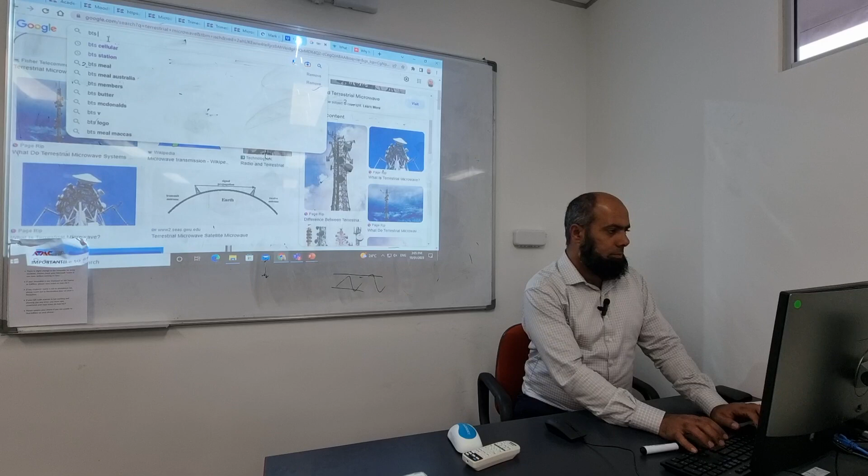So with that microwave link, you are sending a huge amount of data to that area, and then from there you are moving that data forward. So you can see this is line of sight, where they can see each other. So remember that these are all line of sight terrestrial microwave links. But whenever you see these ones, you can know from now onward.

For example, these types of things are used for sending signals to us, to our mobile phones, for the mobile tower. But if there is something like this, they are for backhaul communication. For example, our 10,000 customers' data already reaches there, but they want to send all that data to the next level because they don't have wires. So then we use those dishes.

They have microwave links with very high capacity to send through a wireless link. Some of them have both, for the users as well as for microwave links. But in city areas, you never see these types of dishes. If there is one, wherever it is focusing, you will see another one somewhere else where they can see each other.

Because in the cities they don't need it to make a link, because there is already an underlying network of optical fiber there. That's more in the hilly areas, on the motorways, or in the rural areas where you don't have enough facilities to do that. So we use a parabolic dish to focus a narrow beam onto a receiver antenna. That's the parabolic dish which I showed you in the form of a drum.

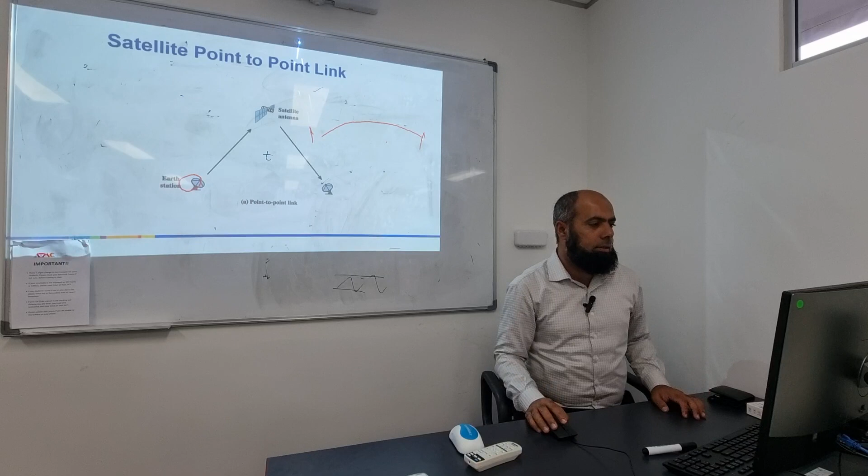On the other hand, if there is a cricket match or a live match going on somewhere, from there you are transmitting the signals to the satellite. From the satellite, you are getting that signal to multiple receivers all over the world, wherever you want it, based on their uplink and downlink frequencies, which are already fixed.

The last one, infrared. Where do we use infrared? Anyone have an idea? There is the infrared sensor in mobile phones. The infrared sensor, we can't see it in our eyes as well. Remote controls. Yeah, remote controls have infrared lights. So it's line of sight or reflection, and it's blocked by walls. If a wall is there, our remote can't work. No license is required. Typical uses are IrDA ports or TV remote controls. They are also sending data.

So remember, today's lecture was about the physical layer. The physical layer includes twisted pair, coaxial cable, optical fiber, terrestrial microwave links, satellite links, and infrared. These are all the different methods by which your data can be sent. That's all for today's lecture, and there are more characteristics of various media you can see online on this link. The next topic next week is cloud and mobile networking.